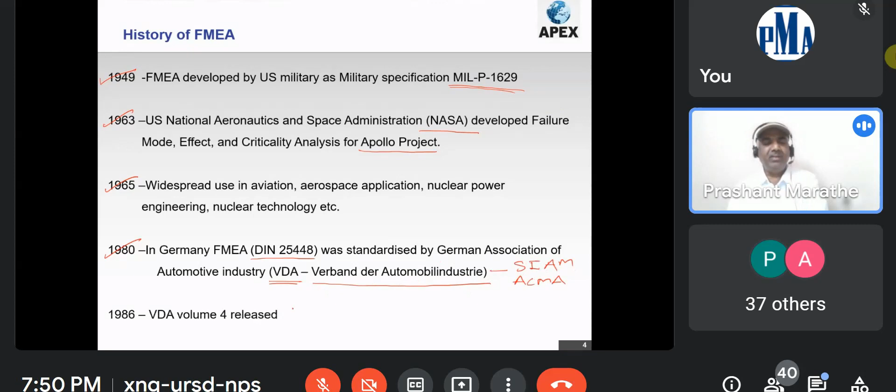And then they started revising that standard periodically. Volume 4 was released. Then they bifurcated it into DFMEA and PFMEA in 1990. In 1993, AIAG, another association, developed this reference manual, and the main players in that were Ford, Chrysler, and General Motors, popularly known as the Big Three. Around the 1990s, they had almost 95% of the automotive vehicle market share worldwide. The association is the Automotive Industry Action Group.

So basically, there were two standards worldwide, one from VDA and one from AIAG. VDA was the European standard, and AIAG was the American standard. So practically, we cannot say there was one common standard worldwide, because European OEMs were asking their suppliers to meet VDA's requirements, and American OEMs were insisting upon the AIAG standard. Due to globalization, the suppliers are now common to European and American OEMs, and they realized they have to commonize these two standards.

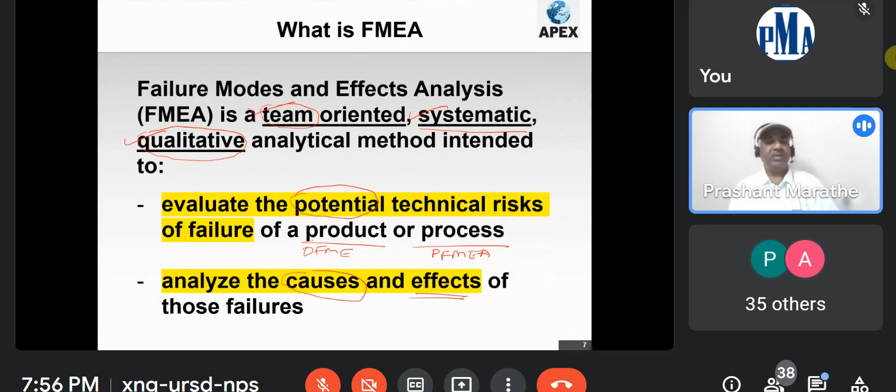So after identifying this particular potential risk or potential failures, then we have to analyze what is the cause for that particular failure and what are the effects of that particular failure, so that we can understand what is the severity of that particular failure, and we can prioritize that. So that is also one of the things.

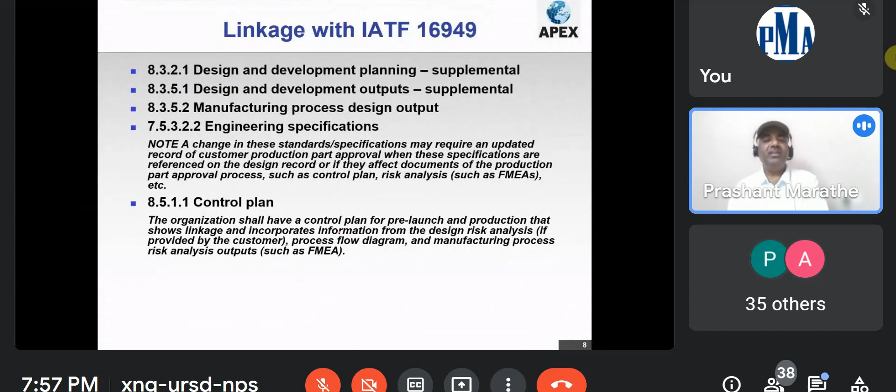And there is a very strong linkage between the IATF 16949 standard and FMEA. I will not discuss in detail, because many of you from the automotive industry know that. So this is a standard requirement, and you can find FMEA at various places, at various clauses. So you can see that in various places this particular FMEA is mentioned.

So even for internal auditor competency, they have mentioned that the auditor shall, which means a mandatory requirement in IATF terminology, know or understand this particular PFMEA in detail, and even any external changes in standards like ISO or IATF. So they must be aware of those particular standards in their organization. So this is the linkage between IATF and FMEA.

But a word of caution. Even though I have mentioned this particular linkage and standard requirements, this is just a compliance requirement. So FMEA, if you do it just for compliance, you will not get the desired effect and desired results. So we have to have an approach of improvement.

So if it is just for the compliance purpose, maybe if you are thinking that you should not get any NCR or non-conformity in the external audit, or it may be the PPAP requirement, which is the mandatory requirement of the automotive OEMs, that the supplier should complete PPAP and those 18 documents. Out of those 18 documents, FMEA is one, to just comply with that requirement, because without that you cannot send a single component to the OEM.

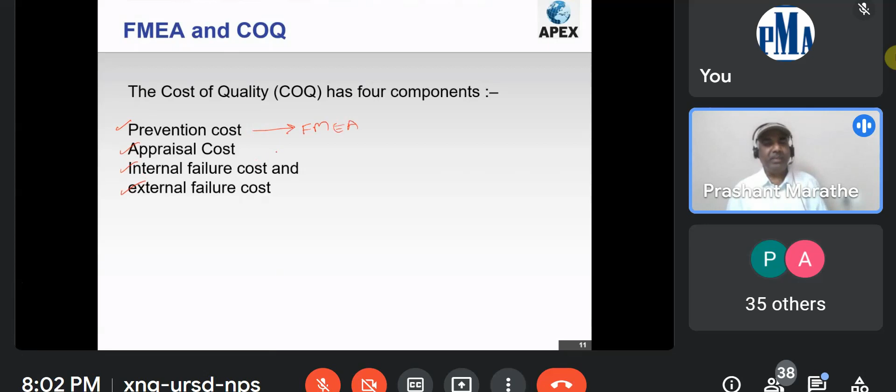So basically, whatever cost we have for FMEA, maybe the time of those FMEA team members, or maybe certain preventive measures we have to take, a very small investment may be required, but with that we can definitely reduce the other 3 types of cost. That is appraisal cost. Appraisal cost basically means the inspection and testing cost.

Internal failure cost and external failure cost is basically whatever failure happens. So maybe your rejection, rework, scrap, that is basically internal failure. And external failure means the failure happens after your product goes out of your factory, or after you give service to your clients. At that time also you may have customer complaints, maybe rejection, maybe warranty failures.

So with a small investment in this prevention cost, we can have substantial reduction in the cost in other areas, so that we can reduce the total cost of quality. And a good FMEA definitely reduces this cost of quality. Here I have purposely written a good FMEA, because FMEA alone will not reduce the cost of quality if it is just for compliance. If it is really for improvement purposes, then and only then will it reduce the cost of quality.

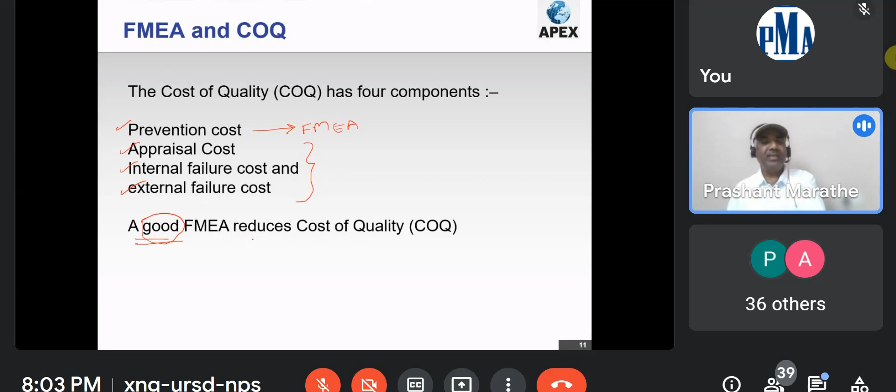The second change, and I will say this is a very big change: they have introduced a 7-step approach. And what are those 7 steps? These are the 7 steps. In subsequent slides, we'll be discussing more on these 7 steps. So why have they introduced this 7-step approach? To make it more and more systematic, so that nothing is missed and the quality of that FMEA is good.

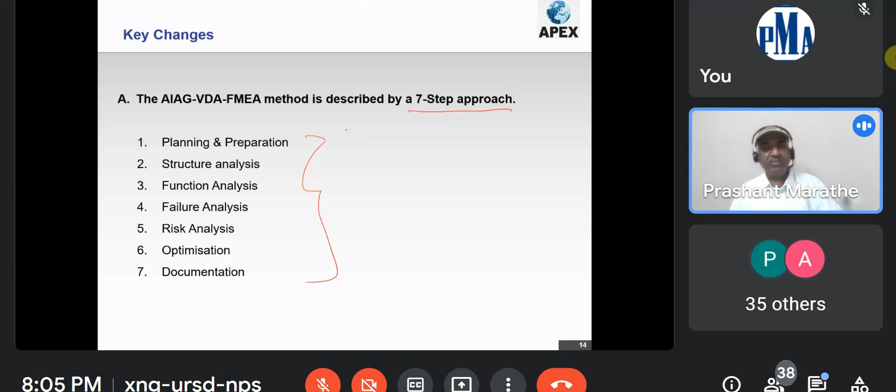So basically for making it more systematic, in one of the earlier slides we have seen that it should be systematic, they have introduced this 7-step process. If you know the older standard, that is the 4th edition, the first column was process step and function. In the new standard, they have bifurcated the process step into 3 columns: process item, process step, and process work element.

And the other half, that is function, they have also bifurcated into 3 columns: function of process item, function of process step, and function of process work element. So in the earlier format there was only 1 column, and now for that column there are 6 columns. Somebody may argue that the work is more tedious in this new standard. But let me assure you, because of this, it is so much simplified. It is so easy to do FMEA.

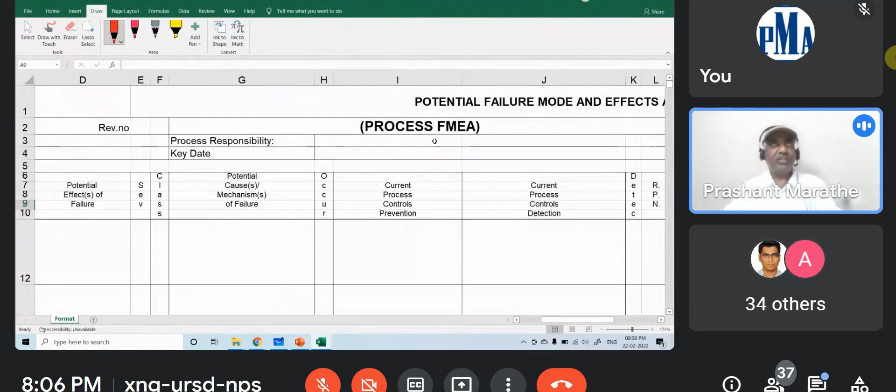Definitely, if you know the basic intent of that particular thing. So just to have a glimpse of the old standard and new standard, I will show you. So this is basically the old standard. In today's talk I will mainly be discussing process FMEA, but the same is applied to design

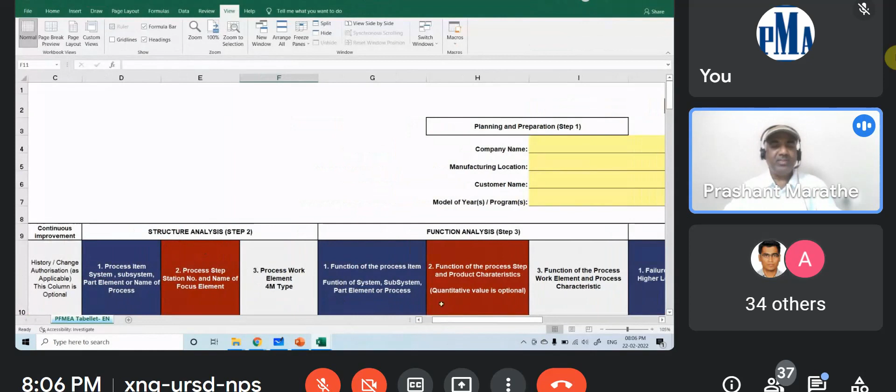FMEA. So this first column, process step function, is now converted into six columns. In structure analysis you can see there are three columns, and in function analysis there are another three columns. So these six columns are there, and we'll quickly discuss that also.

Other changes are that they have changed the sequence of failure mode, effects, and causes. Now the sequence is failure effect first, then the failure mode, and then the failure cause. This is quite logical. If any failure is there, friends, it will happen through a certain mode, and that failure mode will have a certain effect, right? That is the failure effect, basically to the customer. The customer may be your internal or external customer.

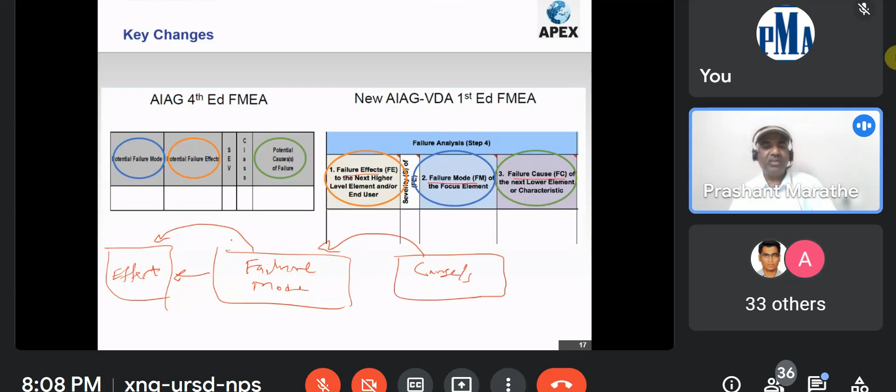So failure mode will result in the failure effect, and for the failure mode to happen, there are some causes which are responsible for that failure mode. So causes result in the failure mode, and the failure mode results in the effect. That is the sequence they have now changed in the new standard, and that is quite logical.

There are small changes, like they have clarified the special product characteristics; earlier it was classification. And one of the biggest changes is that the RPN, risk priority number, has been changed to the action priority. That I will discuss in detail. And in risk analysis, all three tables, severity, occurrence, and detection, are redefined.

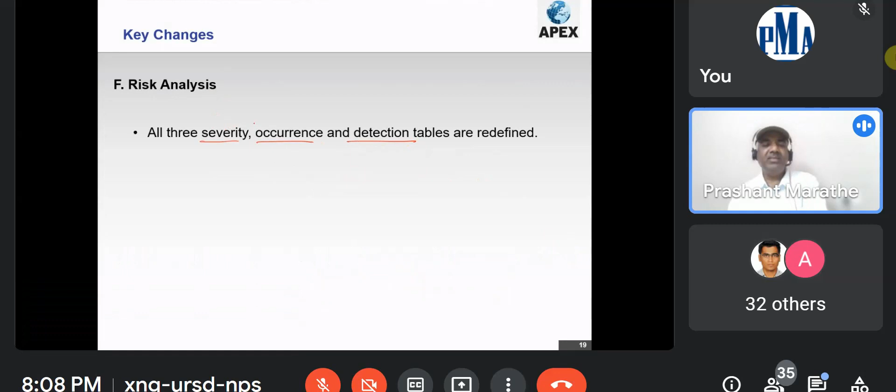So this is basically the severity, occurrence, and detection, S, O, and D. For severity there is a ranking from 1 to 10, as well as for occurrence and detection. The 1 to 10 ranking is the same in the new standard also, but the criteria of the SOD were totally changed. These tables are, I will say, totally revamped.

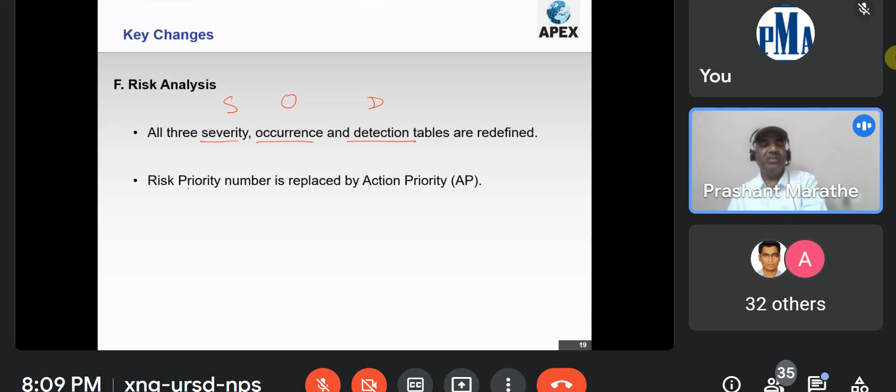Earlier, for RPN, we used to multiply all these rankings, right? So S times O times D is basically the RPN number. Now that is totally removed from the standard and replaced by action priority. As I mentioned, this is a qualitative tool, but the RPN number was giving some quantity, the multiplication of SOD ranging from 1 to 1000.

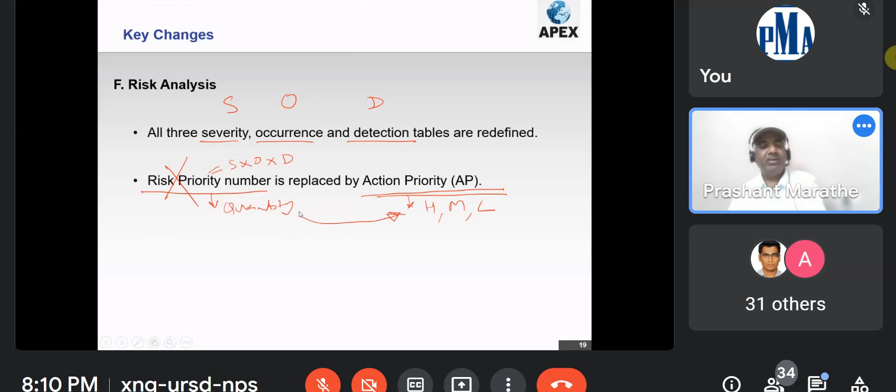Now the action priority is either H, high priority, M, medium priority, or L, low priority. So they have converted it from quantitative to qualitative parameters. There was unnecessarily too much discussion on what the threshold limit for RPN is and what the ideal value of RPN should be. Now they have removed everything, and a separate AP table is introduced. Similarly, recommended action is bifurcated into preventive action and detection action, and a status column is also included.

So now let us discuss with a case study. Let us say there is an electrical motor manufacturer, making the electrical motor for the window glass of a power window in a vehicle door. There is the window lifter mechanism, and the window lifter electrical motor, which is used for movement of the glass either upward or downward. This is a power window.

So basically there is an OEM. For the OEM, the door manufacturer is, let us say, the tier 1 supplier. The window lifter mechanism supplier to tier 1 is tier 2, and maybe the electrical motor is the tier 3 supplier. So if we want to implement FMEA for this electrical motor manufacturer, we'll see how to do that. Along with that, I will also explain some other examples.

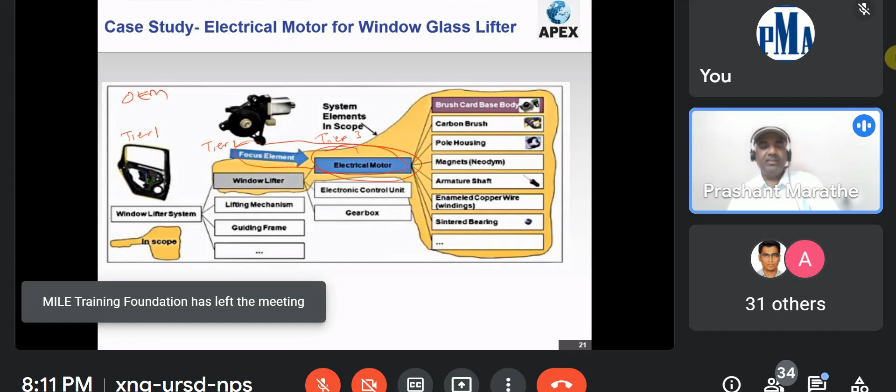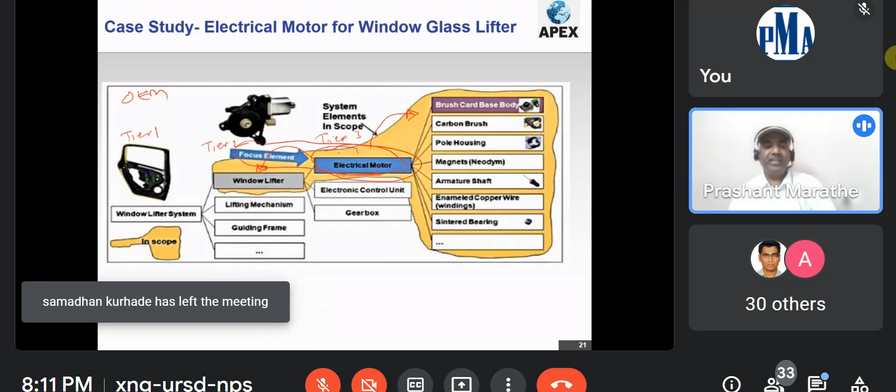For the electrical motor manufacturer, our focus element is the electrical motor, the higher assembly is the window lifter, and the lower assembly may be sub-assemblies and components in that electrical motor, on the right-hand side. So for DFMEA this is basically the structure, and for process FMEA we will see what the process is for manufacturing the electrical motor and what the steps are.

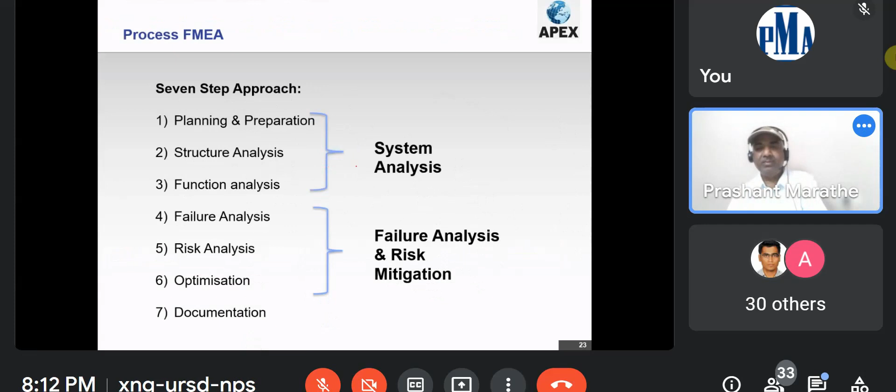The steps will be the focus element, and we'll see the higher level and lower level of that particular process step. So basically, we'll be discussing the process FMEA for this particular electrical motor manufacturing, and we'll go with the 7 steps.

The first step is planning and preparation. In this planning and preparation, the first step is basically to describe the boundary - what is to be included and what is to be excluded in the FMEA.

And one more important thing we have to remember in process FMEA is that you have to cover all the processes which are happening in your organization. Don't worry about whatever is coming from the supplier - that should be addressed in the supplier FMEA.

But whatever is happening right from the receiving inspection or receiving of the material till the dispatch of that particular component, because failure can happen at any place, isn't it? In receiving also there can be failure. Maybe that particular defective part, or the lot having defective parts, may actually be accepted or made okay.

And it will give a failure in subsequent steps, like in production, or maybe at the last dispatch stage - maybe there is an activity of loading that particular final packet into the truck. Maybe at that time, suppose, just for an example, it is to be loaded upside in a particular direction. But if it is not in that way, maybe on the side face it is loaded, or it is upside down.

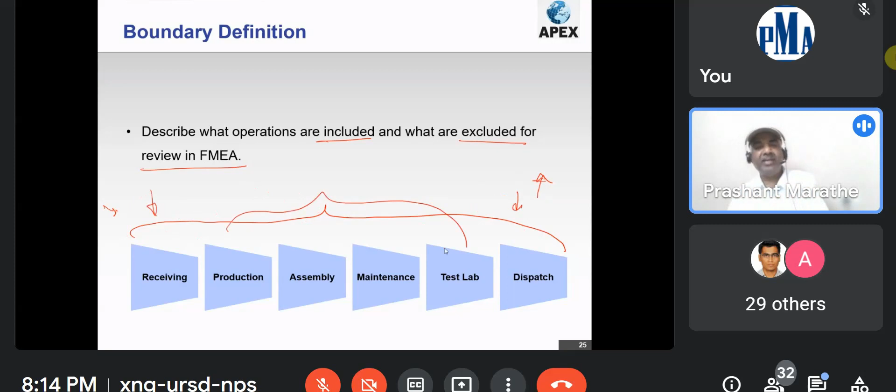As you know, there are very confidential aspects in FMEA. In fact, it is a very good knowledge base, and many areas or things are basically very confidential and very critical for that organization, and they don't want to disclose that particular thing. And whenever it's a patented product or patented process, or there is heavy competition in the market, definitely the supplier or organization doesn't want to get it leaked outside their organization.

So to solve this particular problem, they have mentioned this particular field, so that you can mention either business use - meaning anybody can use that particular standard, this FMEA standard - or proprietary, meaning this will not be given outside, but whenever a customer comes, they can view that particular FMEA. And the third is confidential.

So confidential means even if the customer comes to your place, you basically have the right not to show them. But definitely in the 7th step, the last step is documentation. Even though you are not submitting the entire FMEA, the documentation - that is a summary of that particular thing - you have to submit.

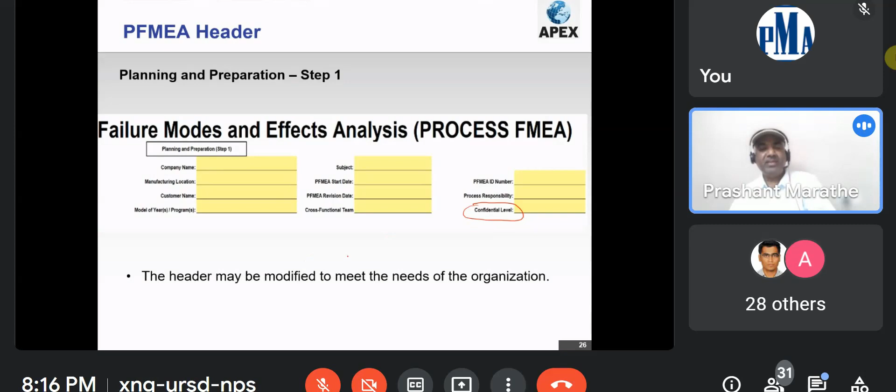In step 2, this is structure analysis. Basically, the process flow diagram is the input for this particular step. And you know there are a lot of process steps. For example, this is a process flow diagram for the electrical motor, with operation 10, 20, 30, 40.

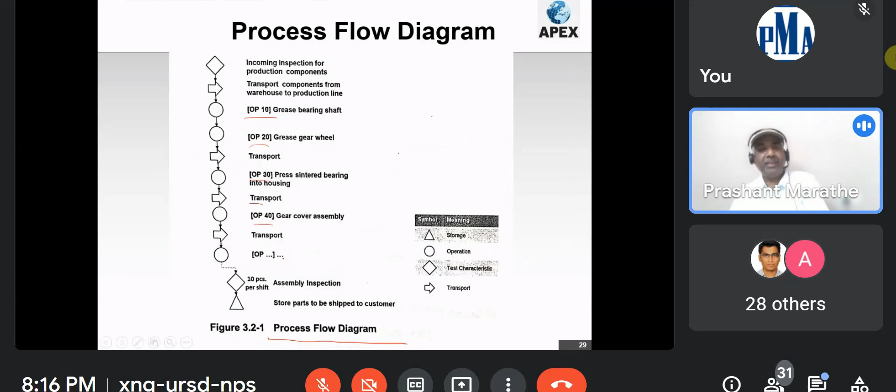So like that, you have to see what is basically the structure of my FMEA. And then this is basically my electrical motor - this is the electrical motor assembly line, and it has got various steps like operation 10, 20. So the center column, that is the focus column, is basically the process step.

And the higher level is basically the electrical motor assembly line. In other words, if I complete all the operations from operation 10 to the last operation, that is actually part of which bigger process? That is basically the electrical motor assembly line. And on the right hand side, on the lower level, these are the 4 elements.

What are the 4 elements? Man, machine, material, and environment. So basically these are the elements which are required for each step.

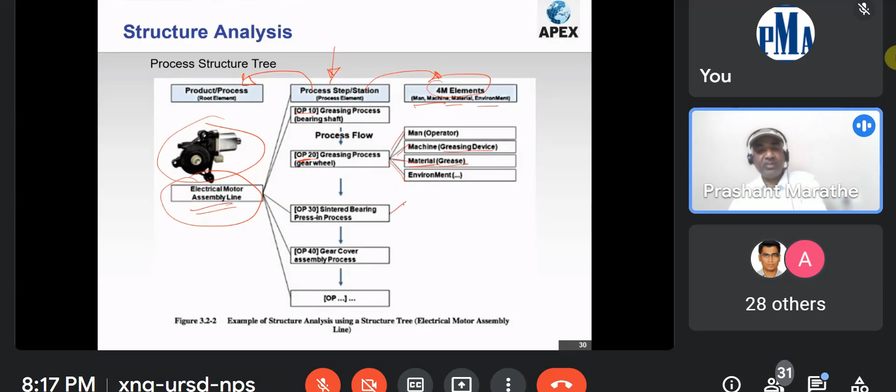For example, for operation 20, the man is required, so you can write the terminology of your organization, maybe operator or associate. The machine required, maybe the greasing device is required. Which material, here actually indirect material is mentioned, so that is the grease. What is the environment requirement, if any condition is there. So for each step you have to bifurcate it into 4M.

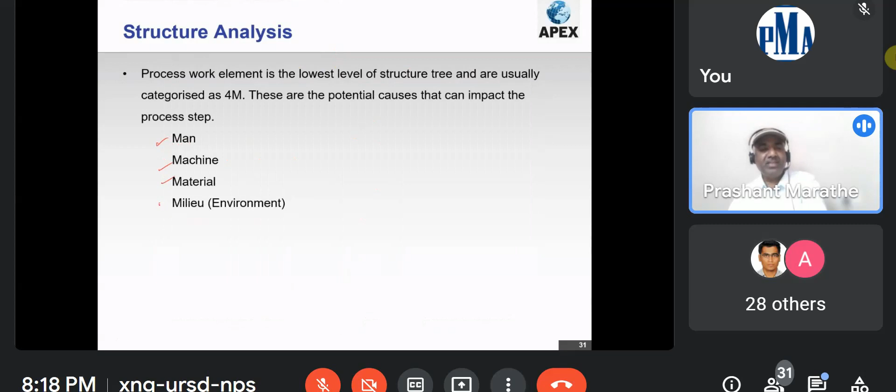And the next step is basically this 4M: man, machine, material, and the last one is actually the milieu. This is a German word, the meaning is environment. But you can add method and measurement also, just like the cause and effect diagram or Ishikawa diagram, we use 6M. Or even in addition to the 6M, you can add fixtures, toolings, etc. as per your organizational process behavior.

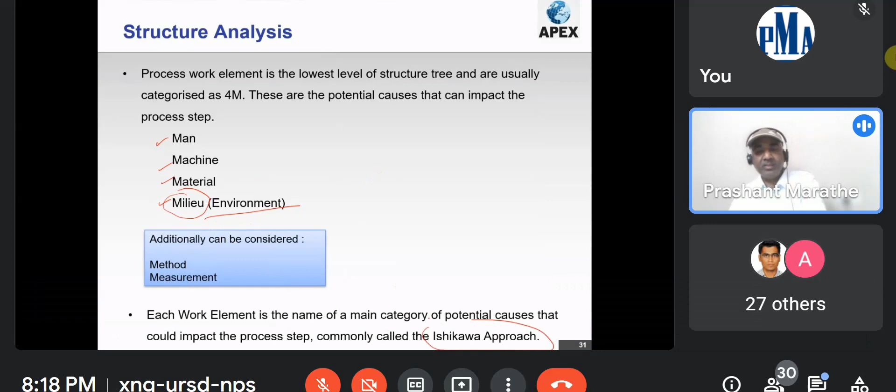So basically this is the Ishikawa approach we are utilizing. The basic difference is when we are using Ishikawa after the failure, we are actually preparing this cause and effect diagram. But in FMEA, we are doing this Ishikawa diagram before failure. So before failure, we are getting the cause and effect diagram. That's the beauty of this particular standard.

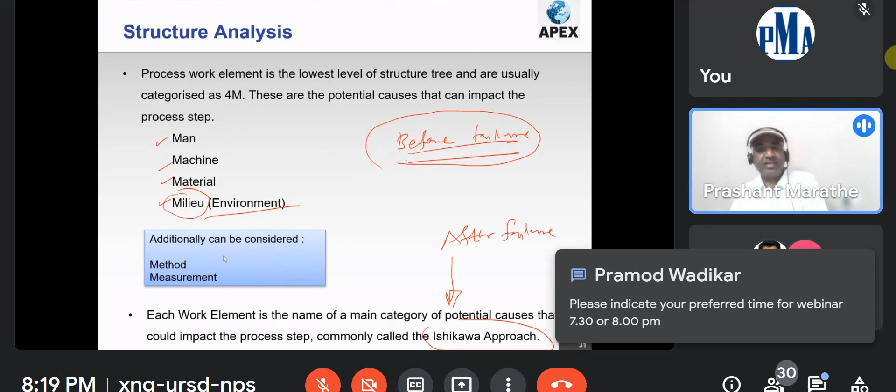And why to wait for that failure to occur? If really you want to take action, it can be done before also. So that's the beauty of this particular standard. This new standard basically helps us to bifurcate all these causes into different categories, and at the end we will directly get the causes classified under man, machine, material, and maybe 4M or 6M.

In the function analysis, whatever we have mentioned in the structure, the functions of those particular elements you have to write. That is nothing but the requirements or characteristic. It may be a product characteristic like dimension, geometry, etc. It may be a process characteristic like speed, feed, current, temperature, etc.

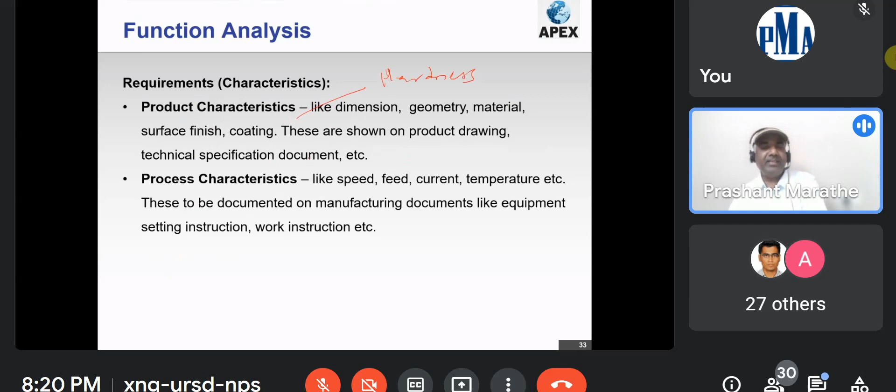Because to control the process, to have the right characteristic, let us say you want the proper hardness of your final product. Let us say hardness is a characteristic. So for getting that required hardness, you may be required to set a specific temperature in a particular range of the oven, or the time or the speed of the conveyor. Those are basically process characteristics.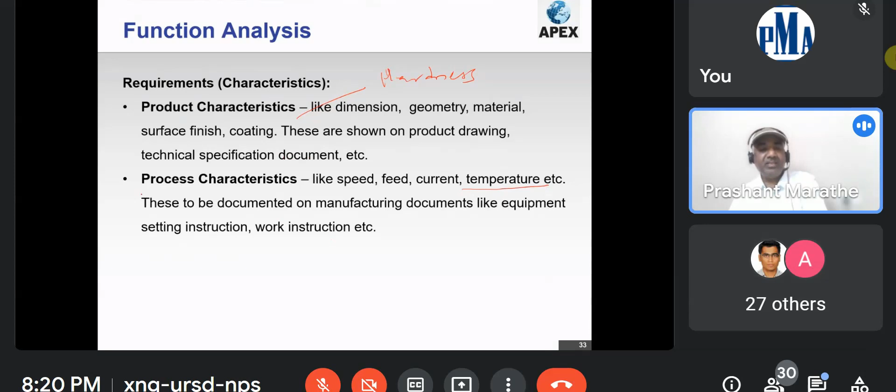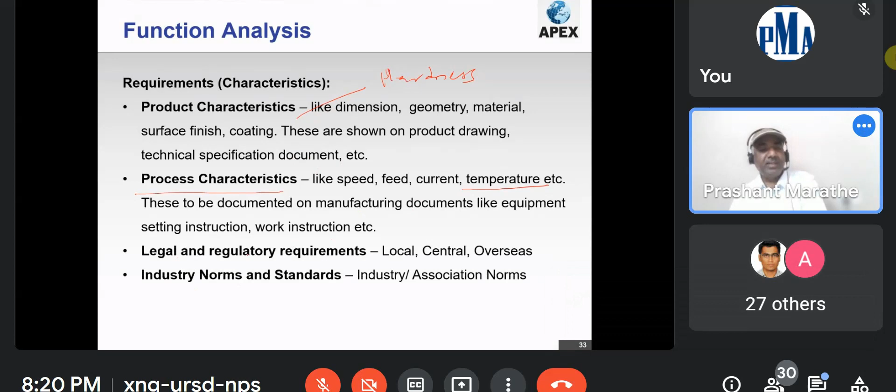So in combination of these characteristics, you have to basically control the process, and not only product and process characteristics - there are other requirements like legal and regulatory requirements, which can be local, central, or even overseas requirements. Then industry norms and standards, then internal requirements like cycle time and production cost. In fact, this is also the function of that particular process step.

Now we have to analyze this particular process step, operation 10, operation 20. So not only do I require this particular hardness or specification in the required value, but it has to be completed in the specified cycle time or production cost. That means FMEA is not only addressing quality, it is addressing your productivity as well. Because that is also a failure - if that operation has to perform in, let us say, 6 seconds, and if it is taking 8 seconds, even though I am getting the required characteristic, required hardness, but if the cycle time is more, that is the failure.

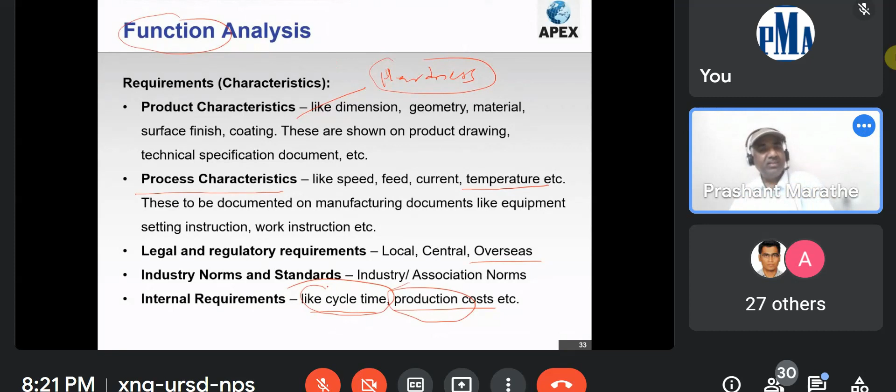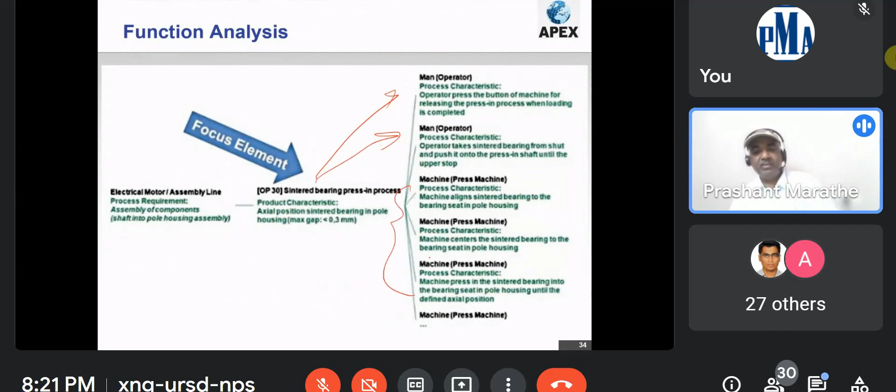So that can be also addressed in this particular function analysis. That is what is actually written in function analysis. So maybe then you can write whatever we have done in structure analysis, man, machine, material wise - you can write the function also, the man. So now for each function there can be 1 or 2 or more than 2 functions. Similarly for machine, there can be different functions. So it has to be mentioned 4M wise.

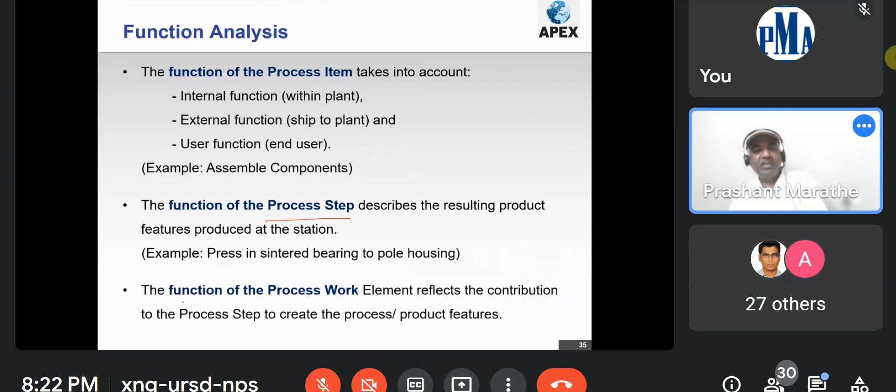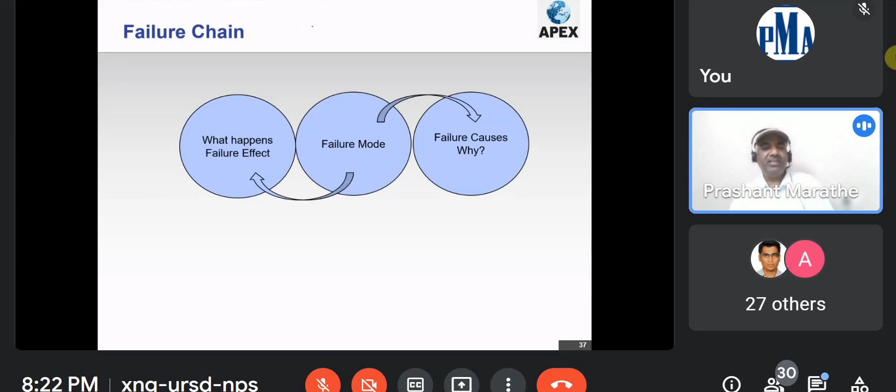So this particular flow, they have taken from the structure analysis to function analysis, like function of the process item - maybe internal function, external function, or user function, or it may be for the process step or the function of the process work element. Okay, so basically after this function, then we move to failure analysis. What is the failure? Whatever actually, if the function, if that particular process step is not performing its function, or opposite of the function or negative of the function, that is a failure. And these are the 3 columns as we have discussed: the failure mode, effect, and causes.

So it's not only the negative of function that is the failure mode. The failure mode has different categories like loss of function, where the operation doesn't perform at all, partial function which is incomplete operation, degradation of function with degraded performance, intermittent function where operation is not consistent, or unintended function. I will give examples of this.

Let us say this is the case study we are discussing. This is your window with the glass, and this electrical motor is used for lowering or raising that glass. So what is the loss of function here? Even if I press the button, the glass neither moves upward nor downward. That is total loss of function.

What is partial function? That is incomplete operation. If I press the up button, the glass only goes up to a certain level, not completely closing. That is incomplete operation. What is degradation of function? The glass moves completely, but it is very fast or very slow. That is degraded function.

Intermittent function means operation is not consistent, meaning it is not smooth.

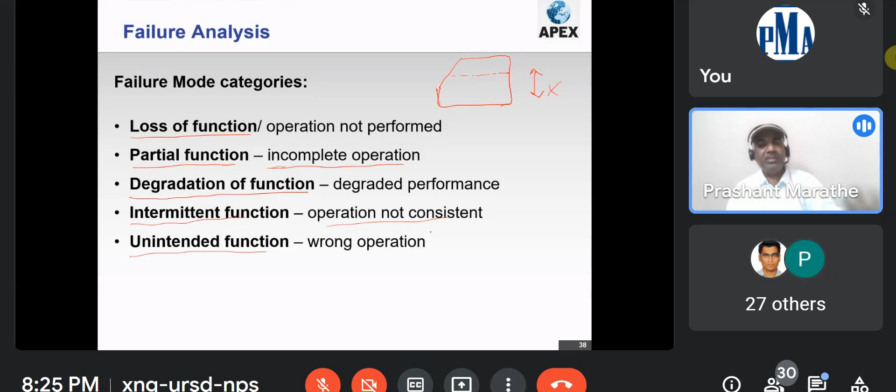Another example could be the airbag. Even though there is no accident, the airbag is opening up. That is a wrong operation.

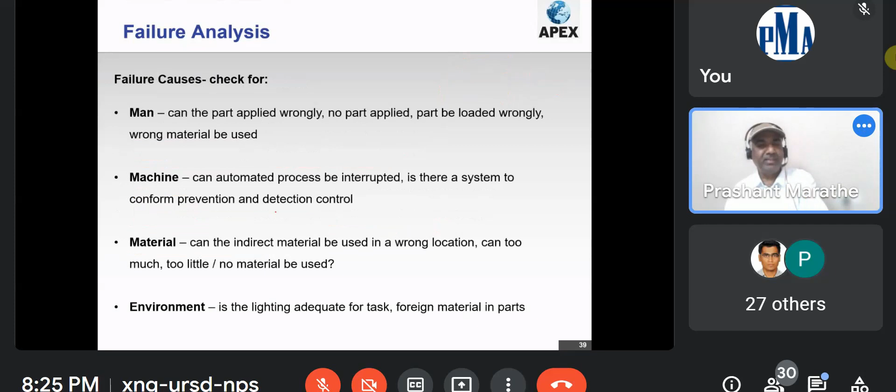There are various failure causes related to man, machine, material, and environment. I will not go into detail, but what could go wrong with the man, the machine, material, and environment could be written in those causes.

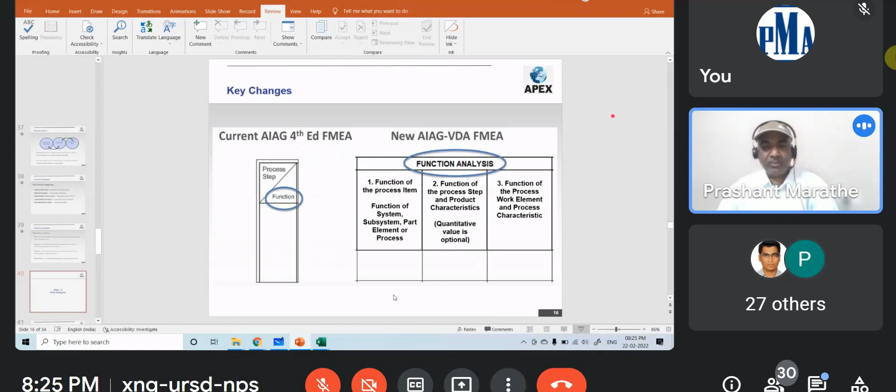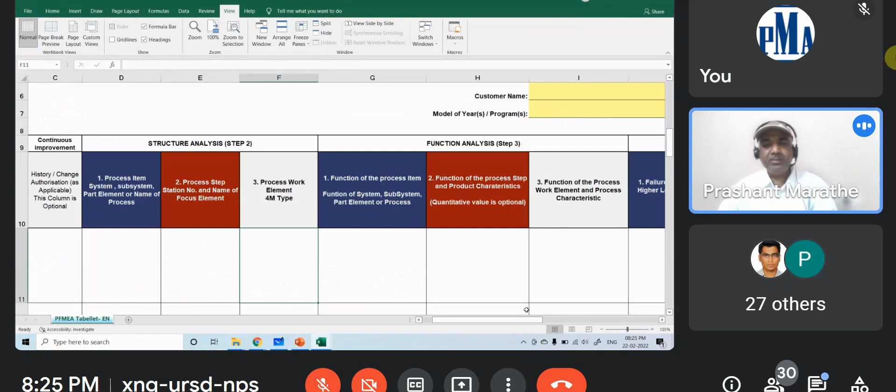So quickly I will show you the completed format of the structure analysis, function analysis, and failure analysis in the new format. Step 1 is just a header, but you can see there is a structure analysis. This is the electrical motor assembly line, and this is the focus element, basically the process step, operation 10, 20.

Now let us take operation 30. For operation 30, man is required, press machine is required, and this is the flow. Whatever is mentioned here will now be written in function analysis. This third column is more important because it is the categorization of all the causes.

Due to paucity of time, I will discuss only the third column. Whatever is written for man, machine - what is its function? That will actually be in the third column of function analysis.

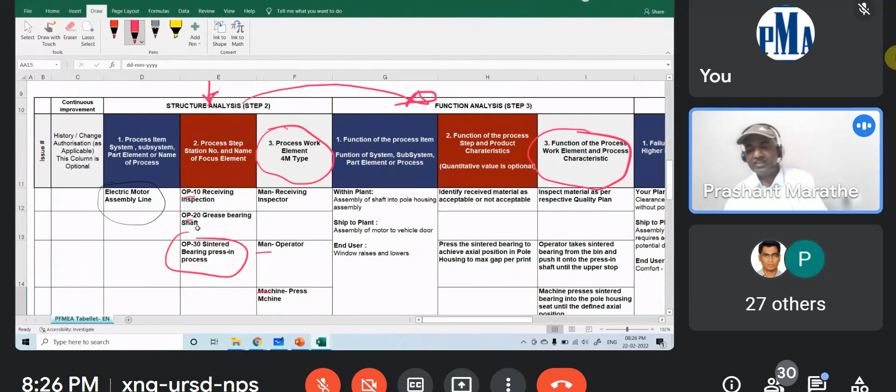And whatever function is mentioned in this function analysis - for example, in operation 30, the operator takes the sintered bearing and ensures that it touches the upper stop. What could be the failure of this man?

The operator does not push that particular bearing up to the upper stop, or in some cases there are stoppers or locators. So whatever is opposite to this - but not only opposite, as in the earlier slide I showed different categories - you have to list down all the particular failure causes, what could go wrong.

This particular column we are directly getting - this is nothing but basically my cause and effect diagram. So friends, to summarize these three steps, whatever is in structure analysis...

Basically I am writing 4M or 6M. So what are the elements in that particular structure? Let us take 4M. Then what is the function of each element? Let us say man.

So it will have maybe 4 functions - this is just an example I am writing. Similarly, for each element there will be different functions. And then what is the failure analysis? For each function there can be different failure modes, and for each failure mode there can be different failure causes.

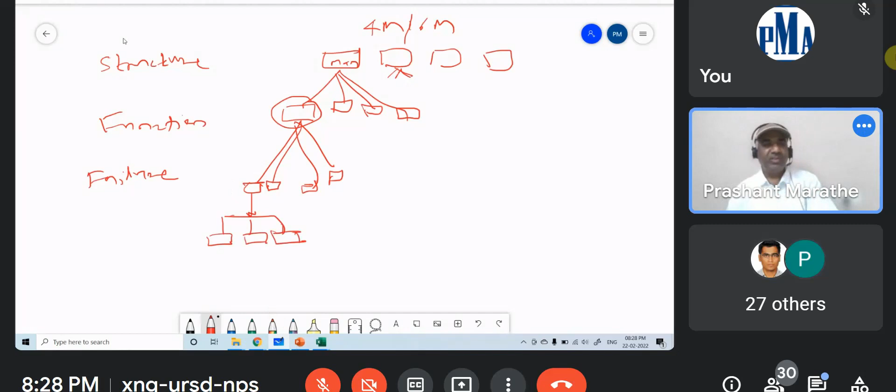So you can see this tree. So how big will be FMEA? FMEA normally runs into a high number of... so this is basically the flow. If you understand this particular flow, it will be very easy for you to understand this new FMEA.

Obviously, after identifying those causes, now I have to identify the risk analysis. There can be a prevention control or detection control. Suppose this is the process failure; it can happen at this particular stage. Whatever is on the left-hand side is the prevention, and on the right-hand side is the detection. If I prevent that particular error or failure in process B, that is basically prevention.

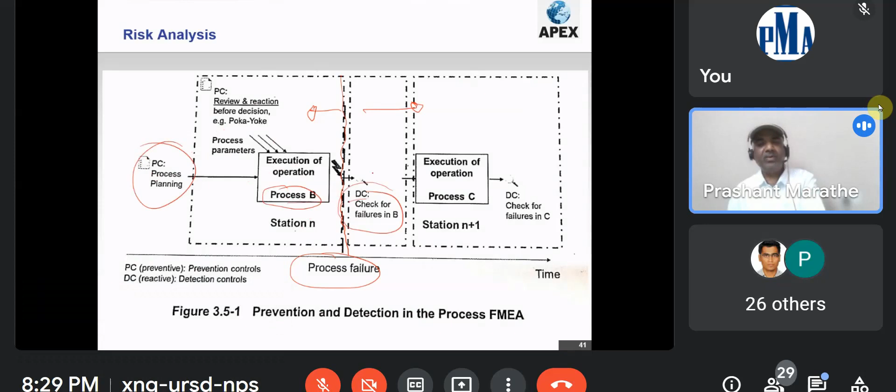But immediately after process B, if I am detecting it, it is a detection, or in the next or subsequent process, station number n+1, that is also a detection. So I have to identify what my prevention and detection controls are at present. Then I have to rate them according to severity, occurrence, and detection. And now, as I mentioned, I don't have to calculate the RPN number. I just have to arrive at the AP.

AP is basically just three options: high, medium, or low. There is a table, and you just select the rating from that table. Due to paucity of time, I cannot go into the details of that. But after looking at that table, you can have either H, M, or L. H means high priority. That means action must be taken.

It is like a shall requirement in IATF, a mandatory requirement. Should means it is a recommendation. Low priority means you may or may not take action; it is not necessary because it has low priority. M means it may depend on your customer or your top management or organization. Maybe they can have a mandate to take action even for M. So action priority was created to give more emphasis on severity first, then occurrence, and then detection.

RPN was giving equal weightage to severity, occurrence, and detection, because RPN was just a multiplication of these. Just as an example to show this difference: suppose my severity is 9, occurrence is 5, and detection is 2. The RPN will be 90. And suppose the order is reversed: severity is 2, occurrence is 5, and detection is 9, the same figures in reverse order. So severity is now from 9 to 2, detection is now 9. Still my RPN is the same.

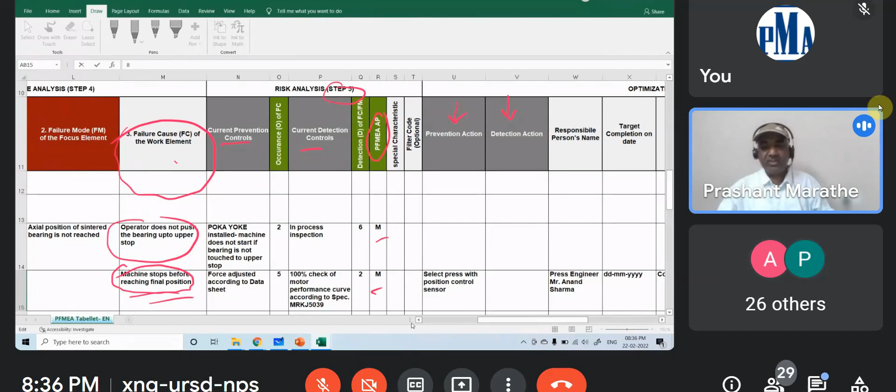But if the machine is not reaching the final position, maybe because of a machine problem, it is not the operator's fault. So for this cause I may have certain controls, but let us say since the priority is M, they have now decided to have this prevention action: select the press with a position control sensor. That sensor will sense whether the force is completely applied to that component. Earlier there was only one column, recommended action, but because of these 2 columns, now it is very clear which is prevention action and which is detection action.

Maybe this will help me if it is a critical step. Maybe I will tell the supplier that detection action is not sufficient for this particular step, you have to take prevention action. Or maybe there is a lot of failure, or there is a previous history. So I can tell him that for this particular step, if it is coming M or H, you have to write this prevention action. And other columns like responsibility, targeted action, and then reassessment of S, O, D and AP.

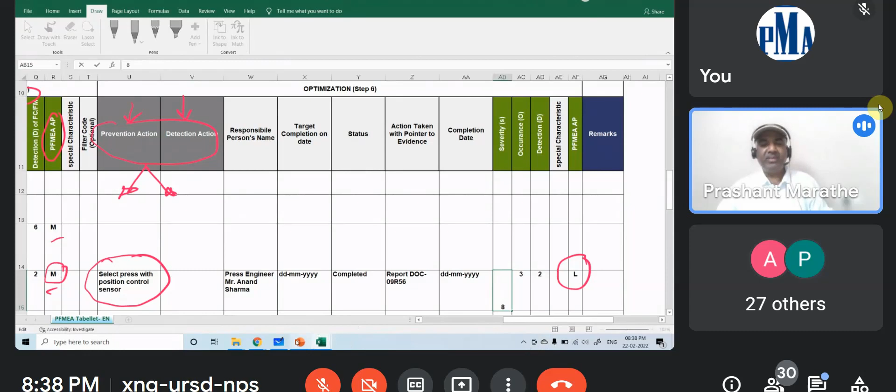So earlier M was there, and now after taking that action, the action priority is reduced from M to L. So that is the effective improvement. And to summarize, I'm coming to the end of this talk. If I recap all these 7 steps, it is definitely very logical. For any process, like in PDCA, the first is plan. This is the planning and preparation phase.

And I have shown this flow: structure analysis means which are the elements in that FMEA structure, man, machine, material, whatever is going to be needed. Then the function of each one, that is the function analysis, meaning structure to function and function to failure. So these 3 steps are very logical. Then after finding the risk, we analyze the risk by rating S, O, D and AP. And after getting that priority, I optimize it with some actions. So basically this is action and action plan.

And the last one is the documentation. Even though the steps are mentioned in the format, these steps are very, very logical, and it is now very systematic and useful in this new standard. And as I mentioned, this can be applied to any product, any process. I'm sorry that I might not have covered all the things. I will skip this particular benefit. Everything is understood by all.